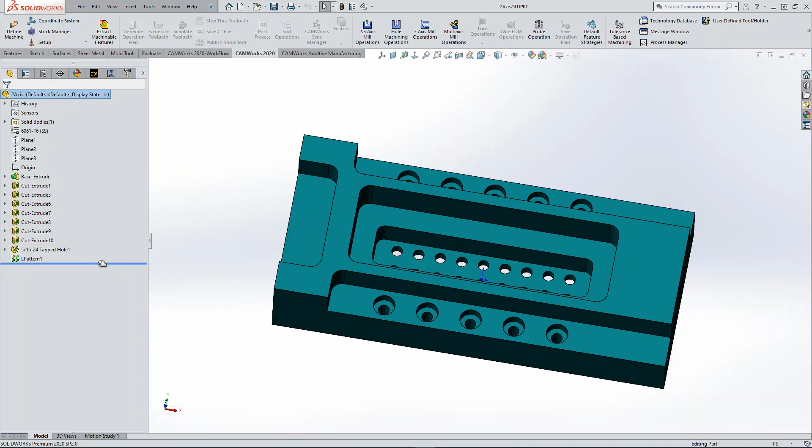But if we look at something like this, for those of you who aren't familiar with SolidWorks, you're basically going to start out with the basic block of the part. You're going to draw up a sketch, tell it how thick it is, and then just either add or subtract from there. So you can see how this SolidWorks feature tree is all built right into this part.

And a lot of that is pretty important in CAMWorks because it sees things like that. It sees that this pocket is 1 inch deep. It sees how wide it is, how tall it is. One of the beautiful things about CAMWorks is it reads the solid model. That's what makes it a very powerful CAM system. So I'm going to go right over to my CAM tab, my CAMWorks feature tree.

Also integrated right into my upper tabs here are going to be CAMWorks. We have a CAMWorks workflow tab. We have a CAMWorks 2020 tab and even a CAMWorks additive tab.

So my first job now, after getting the model, either drawing it or opening it up, is selecting what type of machine I'm going to be using. So I right-click my machine mill, I edit definition. Here's where I select what mode I'm going to be in CAMWorks, whether it's milling, turning, mill-turn, wire EDM, or even the additive. I'm going to just select the mill. Even though I'm selecting mill, I can now also do full 4 and 5 axis indexing from here, and I can do 4 and 5 axis simultaneous.

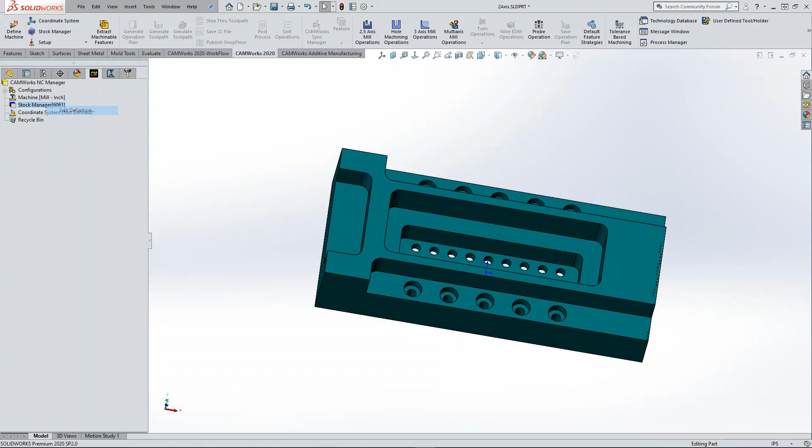So that's done. Now I'm going to go and manage my stock. So I'm going to edit definition on that. First thing you're going to do is select the type of material you're cutting. There's about 25 in this list, and inside our CAMWorks database, there's well over 1,700 that you can add to this. But that's going to drive your feeds and speeds library.

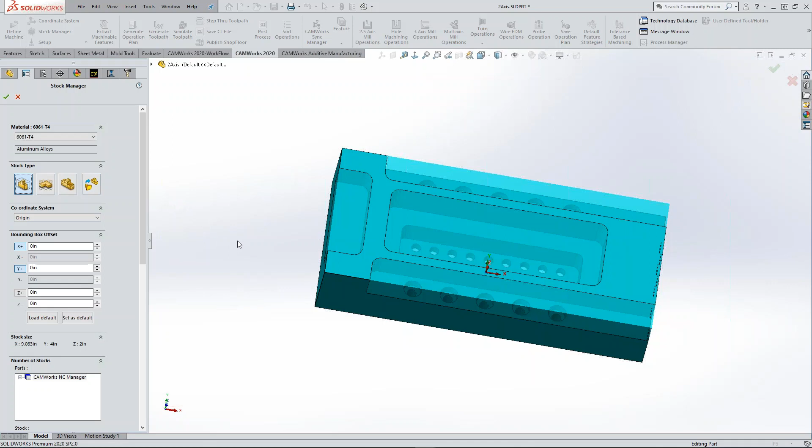Then you pick the stock type or shape. So there's 4 ways in milling to do that. You're either going to do a bounding box like we see here. It defaults to that. You can grow those numbers X, Y, and Z. You can use a sketch for your stock. Draw it up in SolidWorks, and that's your stock shape. You can do an STL or a whole other SolidWorks model. Those last 2 are great for second operations, third ops. They're great for castings. That's when I use these 2 quite a bit. In this case, I'm just going to leave it at the bounding box.

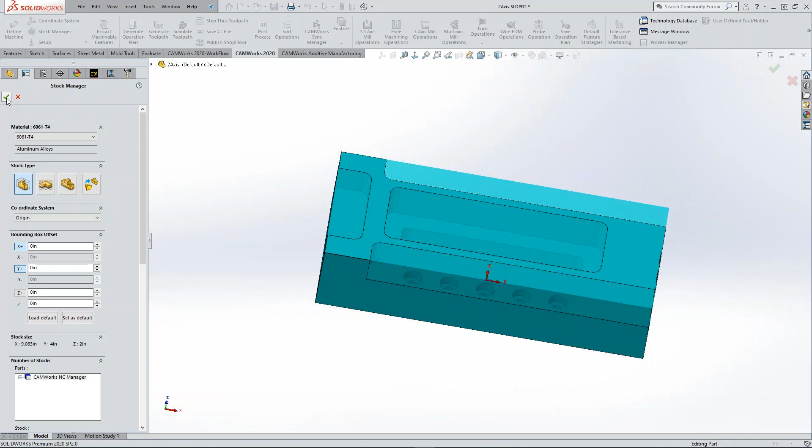Now I'm going to do something that's pretty unique to CAMWorks. It's called Extract Machinable Features, or Automatic Feature Recognition. I'm going to click that button, and what it's doing is analyzing the model. It's trying to find as many 2D features as it can. And that's a tool that really helps you out no matter how complicated your part is. It's going to have some basic 2D pockets and holes. That kind of stuff CAMWorks finds for you automatically.

So just by clicking that button, it's found a rectangular pocket here, a group of pockets here. So I can click on each one of these and I can see what the software has found for me automatically. It's also found what we call a curve feature. This is a brand new feature for 2020. It's going to deburr this whole part, every sharp corner on this, with one single toolpath, and it did that for me automatically.

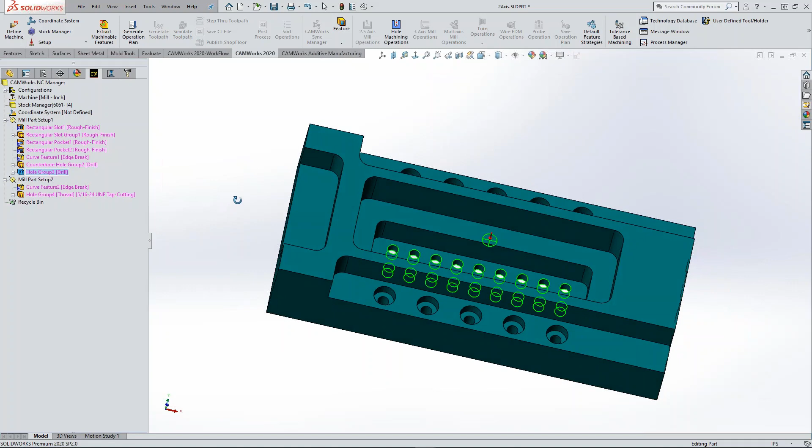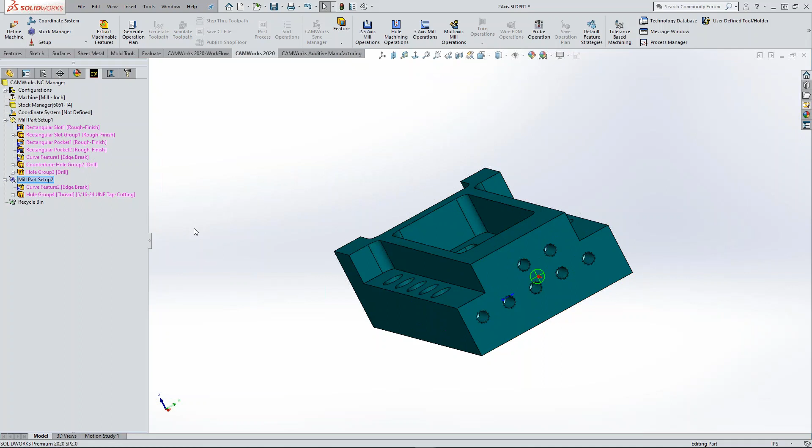It's also finding hole groups, so it sees the diameter, the depth. It even knows that those are through holes, and it's going to see these counterbore holes for me also. The other thing it did when I hit that extract machinable features button was analyze the whole part. So it sees that there are features on this side over here also, and it created a whole other mill part setup for me. And it's going to find the features that it can there.

Now this is a great tool to speed your programming up. These 2-axis features, I don't have to manually go in and make them. I don't have to pick these edges and tell it this is the shape of the pocket, and then go tell it it's an inch deep. These kind of simple 2D features are done for you with the software.

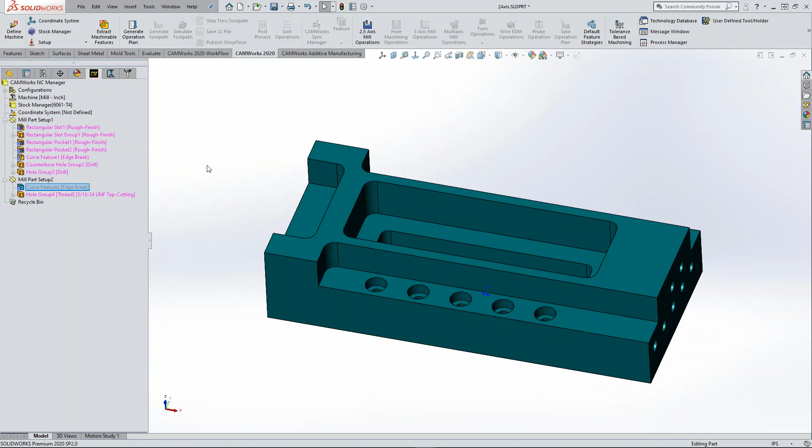I'm going to go ahead and just press this one. I don't need that edge break on that second mill part setup. But from here, if I have more things I want to do, because that automatic feature recognition isn't the end-all result. It's not going to be 3 clicks and you're done. You still have to go in and make your own features, but to do that in CAMWorks, it's very straightforward.

I'm going to right click this mill part setup, and we're going to add a 2.5 axis feature. These are my feature types. This is going to be a boss. We're just going to walk around the outside of this part. So I'm going to call it a boss, and I'm going to pick a single edge off the model, and it's going to give me my correct shape.

Now I can go to my next tab, which is the end condition, and I'm going to select the top face of that part. 2 very important things that I just did there is I selected off the model to create the shape, and I selected the top face to create my height. What that means is if those were to change in the model, my software is going to see those changes and update the feature for me automatically. I'm going to show you a lot about that a little bit later.

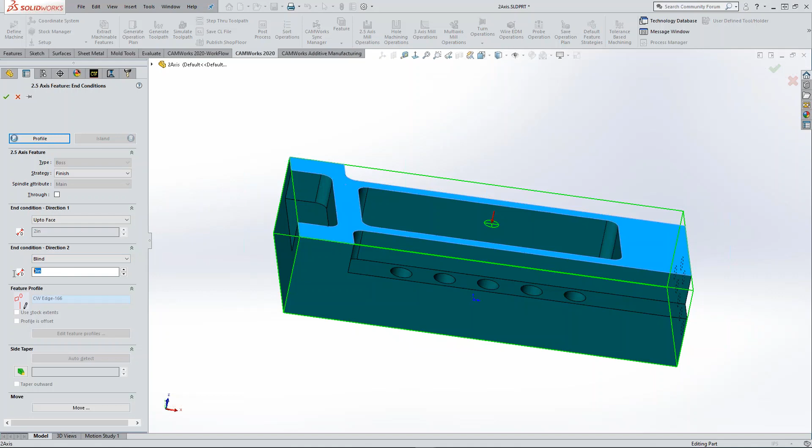But now I can go in and do whatever I want to do. I can pick my strategy for this boss. I can just do a course, or I can do a finish and an edge break. I'm going to leave it at finish. I can come down to my second end condition and just drive this toolpath a little bit deeper past the bottom. So if we zoom in, we can see we're just driving it a little bit deeper. So that's how you add your manual features in CAMWorks.

Very straightforward. I'm going to go ahead and do my next tab up here on the top, and that's Generate Operation Plan. What this does is it looks into my database, and it says, all right, we have a pocket. You've chosen rough and finish for a strategy, and it's going to give me a rough mill and a finish mill for that pocket. If I would have chosen rough finish edge break, it would give me 3 tool paths, a rough, a finish, and then another contour to break the edge. But that database is very important in CAMWorks.

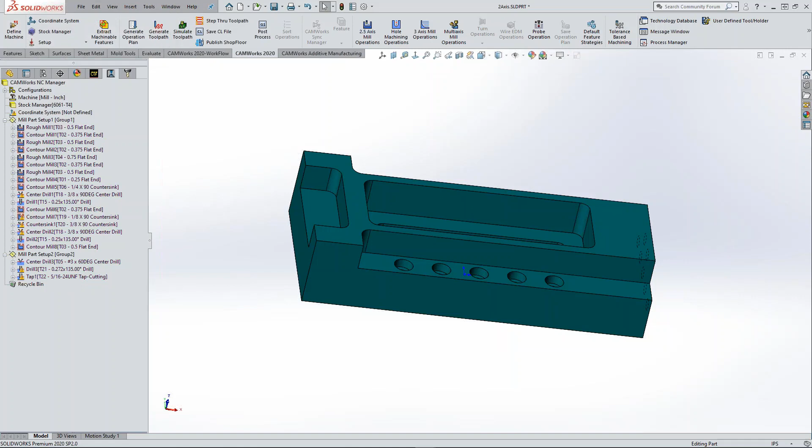I'm just going to go ahead and click the next tab, which will then generate these tool paths. And now I can physically click on each one of these and see tool paths. But that's all coming from the database that comes with CAMWorks. That's that editable feature that I was talking about, that you teach this software. As soon as you get it, you start teaching it how you guys do your machining in-house. So it comes in a little bit vanilla. From there, you teach it exactly how you do your machining.

So if I right click on any one of these tool paths and edit this, you're going to see the parameters that are set in CAMWorks. So here's my tool. I bring my pointer off the screen, I see the tool. If I'm on the mill holder tab and bring my pointer off the screen, I'm going to see that. It's all interactive, so it's very visual. If I want to drop that down, my protrusion, you're going to see that it drops it down right on the screen. But every other parameter for this toolpath has been set in CAMWorks.

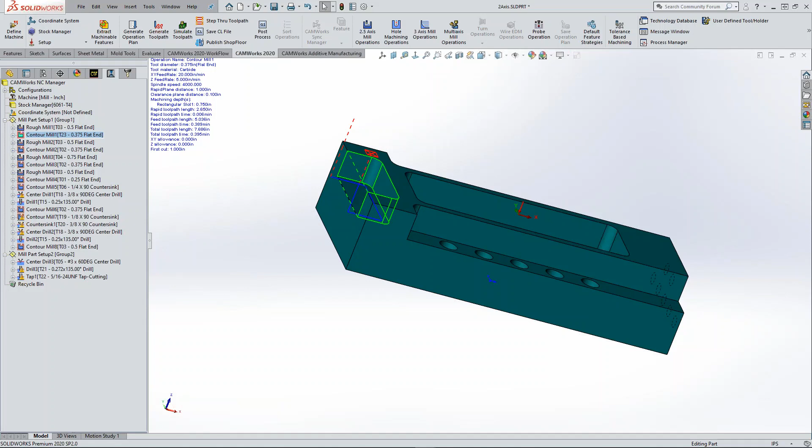And it's completely editable on the fly, or you can save it in the database and it'll remember it from there on in. I think that's a key right there, is the ability to be able to save it. So you can take a knowledgeable machinist that's been doing this for years and years and have them work hand in hand with your CNC programmer, and the two of them together can really put together a nice strategy for machining your parts. Exactly.

So at this point, I've got a little bit of work to do. So I can reorder any of my toolpaths. It's all Windows based, so I can just drag and drop things if I need to. I can edit the toolpath like we were doing before.

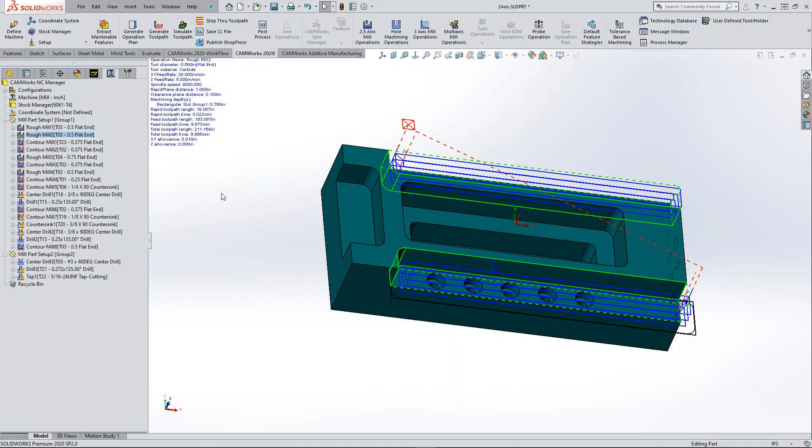Or I can come in here and simulate this toolpath. So if I right click on this mill part setup and simulate this toolpath, this is one of 3 ways you can simulate in CAMWorks, and I'll show you each one of them. But this is the prettier one where you see the material being removed and everything like that. It does a real nice job with the simulation, because this is pretty important.

We want to make sure we're not having any crashes at this point. If we're going to do something wrong, we want to have it happen on the computer screen, not at the machine. So simulation is a very important portion of this. So I ran through that pretty quickly, but there's a neat little tool inside my simulation. It's called Show Differences. So the colors I'm seeing on the screen now are just related to the toolpath colors in CAMWorks. But if I click on this button here, the Show Difference, I'm going to get a graph in

the upper left corner. Green is good. It's cut to the solid model. So what this is doing is it's analyzing my cut toolpath to the solid model. And green is what I'm looking for. Blues, we still have some work to do. We shouldn't really be having any blue, but you can see on those tapped holes, I never simulated them, so they'll be blue. But yellows, oranges, and reds, that means negative.

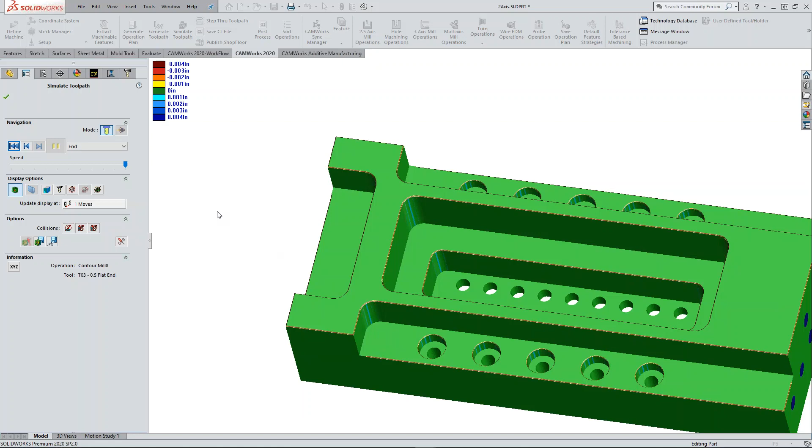That means I'm cutting into this model. And I'm expecting to see that on every one of these corners because CAMWorks deburred this part for me. So that was something I was expecting to see. I'm going to close out of that. And at any time, I can go ahead and simulate that, make a change, do another simulation. CAMWorks does a really nice job with that.

Other things we can do very quickly, if I want to move my origin, I just right-click my mill part setup, and I can, at this point, move this wherever I want to, whether it's a vertex of the stock, top, mid, bottom center of the model. It'll always default to the top. If I want to move it, I just click on an edge, and it'll put it right to that spot. So now that's going to be my new G54. I click OK. CAMWorks is going to tell me there's been a change to my origin, and it's going to regenerate my toolpath. Now everything's coming from that new coordinate system.

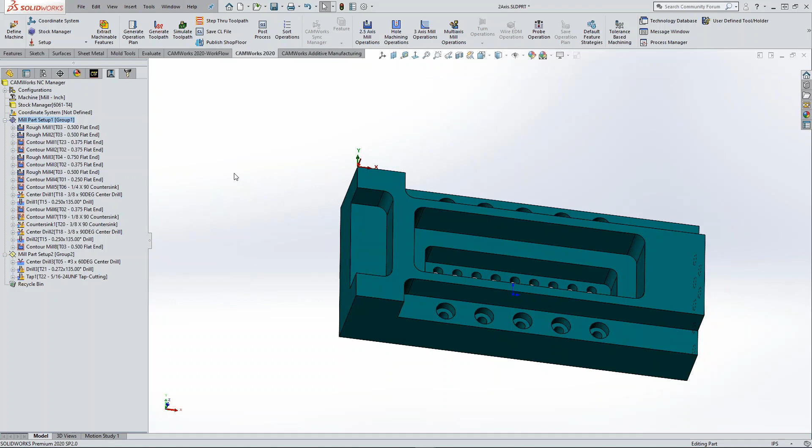Now, the next thing that's going to happen is somebody's going to want to make a change to this model, because I'm just about ready to post this out. If I wanted to, I could right-click, post-process this part. But inevitably, someone's going to make a change to it. So let's take a look and let's make a change to this model, see what happens. Now, we know this doesn't happen in your world out there if you're listening to this webinar, but we hear from time to time that this can be a very frustrating portion of engineering and manufacturing working together. But we've got a way to kind of simplify that.

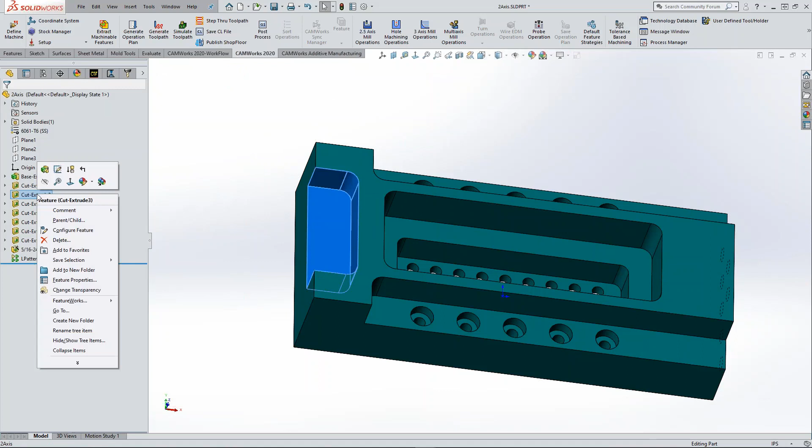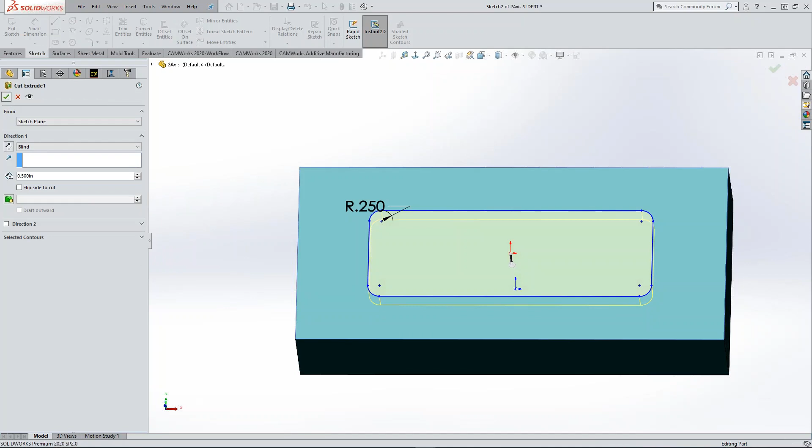So I'm going to go over to my SolidWorks feature tree and make a few changes to this part. So let's go change the size of this pocket. Rebuild that. So we've made that a much bigger pocket. Let's go look at this one. This one will change the thickness of this part. So it's an inch deep now. I'm going to make it a 1/2 inch deep pocket, which will then also make this one deeper.

And then maybe we'll make a change on the part that wasn't there before. So if we go into our hole wizard, maybe we'll throw some tapped holes in here. I'm going to put a tap hole on these faces. And I'm not even going to fully define them. We'll just put them on the model. So we haven't made huge changes to this, but we've made some big enough ones. Next time I go to either one of these 2 tabs, it's going to give me a message. It reads that there was a change to the model. And that's a big time saver.

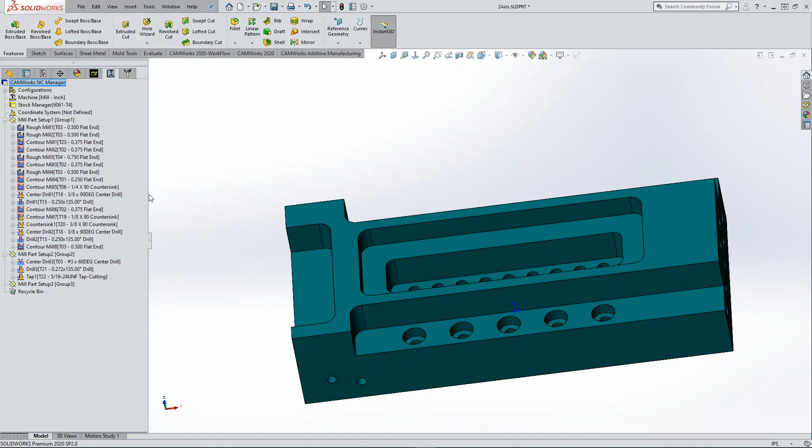So I'm going to click OK, and it's going to analyze the changes I made. It's going to do about 3 things in the background that are very important. Number 1, if I would have changed any of my toolpaths, it's going to remember that. So I reordered these toolpaths. It didn't go back to normal. It kept that and kept all the other changes I may have made.

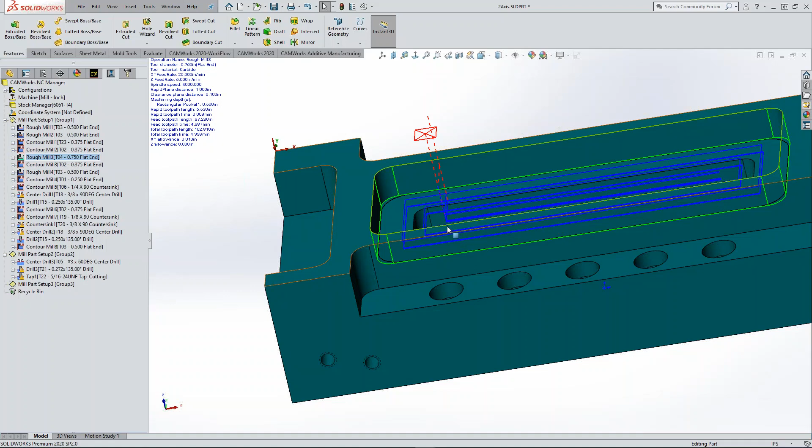But if I look at this rough pocket now, it sees the larger pocket. If I go to my inner pocket, rectangular pocket, it's only cutting it down to a 1/2 inch. So literally I can right click on this and repost it.

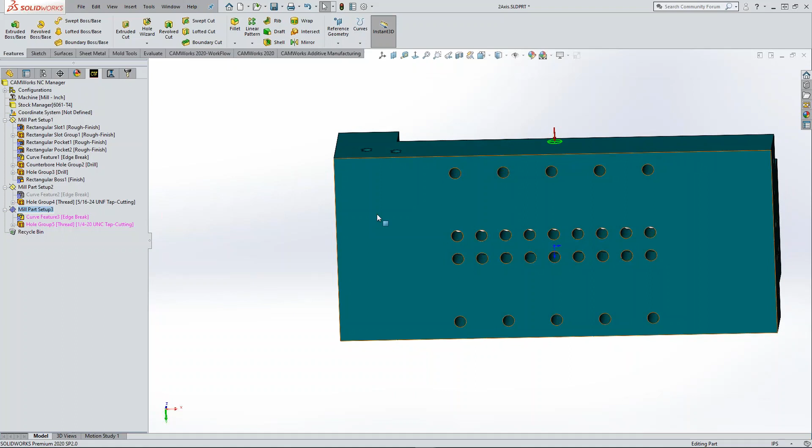And that change really hasn't affected me too much. The other thing it's doing, if I go back to my CAMWorks feature tree, it created a whole other setup, saying we're going to need to set this up in the vise like this because now we have 2 features that have been added to the part, and it sees them. It sees them as tapped holes, so it even knows they're 1/4-20 tapped holes.

If I right click on that and generate the operation plan, it's going to give me a center drill and a tap for that 1/4-20 tapped hole. And that's a big plus with CAMWorks. It's all the kind of things that, you know, I've been doing this for 15 years now.

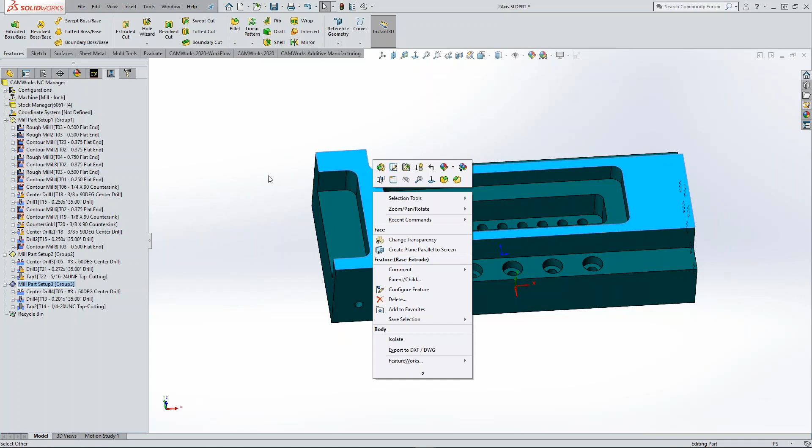You kind of take it for granted, but I'm running inside of a very good CAD system, and I never leave that SolidWorks environment. Anytime I need to draw things or draw my tool path or draw my stock, I'm just right clicking, doing sketches. I'm using the power of SolidWorks as my CAD throughout the whole process. So that's basically 2.5 axis milling on a single part.

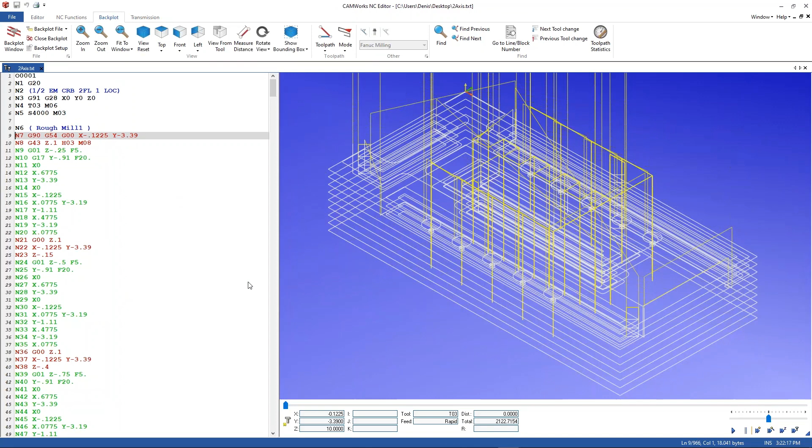There are a couple things I did want to touch on real quick. What I would do now is right click and post process, which is a pretty straightforward process. You hit play, and you've got your code ready to be sent out to the machine. CAMWorks comes with CIMCO Editor, which is a great editing software. It's got backplotting, all color coded. I really enjoy this editor.

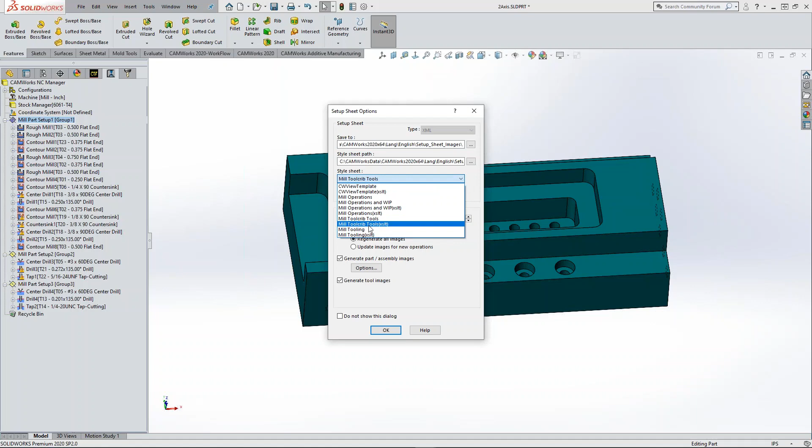Another thing that's a great little tool is called Setup Sheets. I can right click on this setup, mill part setup, and generate a setup sheet. There's about 6 or 8 built-in templates for setup sheets. Let's go click on this one. And this is something that you can print out, send out to the setup guy, and he can have a list of tools for his setup sheets.

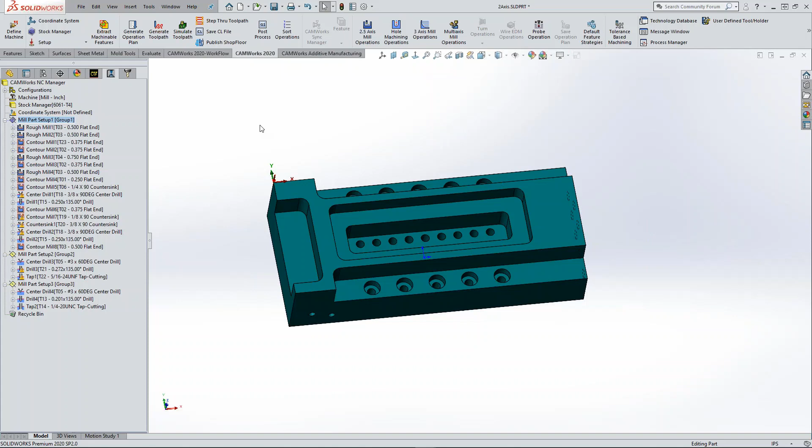Another thing that's brand new for 2020 is going to be probing. So CAMWorks just added probing cycles to its package of CAM system. If I right click, I can now come in and do a probing operation. I can pick the probe I want to use. And this is going to be an example of how I want to do this.

I can probe just Z. Come in here and probe this face. You can pick your location for the probe. You can tell it to now give me a new work coordinate system, G54 or not. So that's a real nice thing that we've just added with the probing. I'm just going to drag that up to the top.

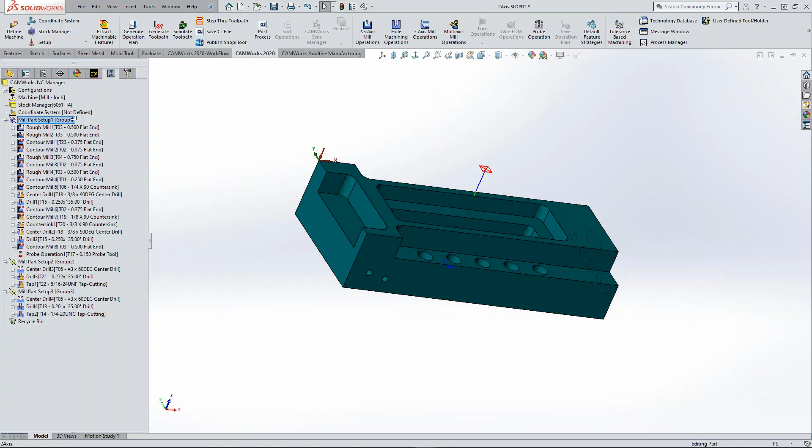So we need to, in mid pocket, measure a pocket size, or maybe even just measure the hole before we start tapping something. Make sure that drill didn't snap off in the hole. We can go in and probe that hole. So that's my 2.5 axis. Now I did want to show you one more thing. I'm going to go ahead and show you.

In 2019, they added something called ShopFloor. I had 3 different things I had to do to get the posted code, to get the setup sheets, and a list of things that the setup guy needs. What they created in 19 was something called shop floor. I'm going to click on ShopFloor, and I'm going to publish this.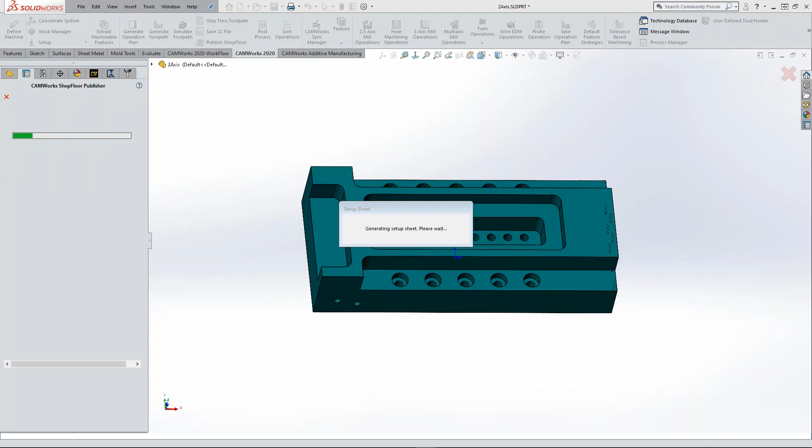This is something that is going to be on a computer out at the machine. Computer, a tablet, whatever you need to have out there. This is not going to have CAMWorks. This is not going to be SolidWorks. It's just going to be on the tablet or the computer at the machine. So this is what the setup guy is going to be able to see.

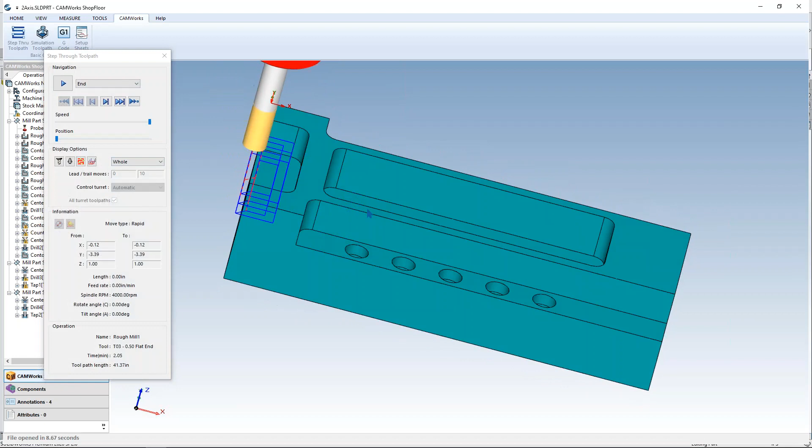He's going to be able to analyze his model, measure anything he needs to on it. He's also going to be able to look at every one of the tool paths, simulate them, step through them, and he'll be able to see exactly what's supposed to be happening when he goes to post-process it or hit the go button on the machine.

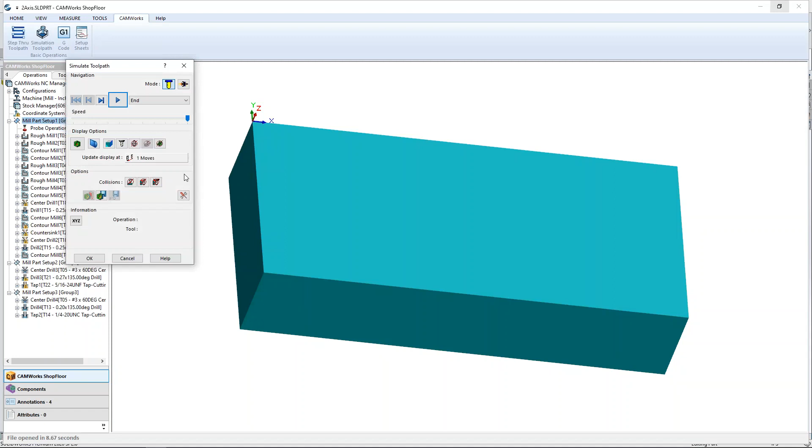Another thing that shop floor created was my G-code. It's all in a nice package. CIMCO editor's got the back plot and everything like we showed before. This really eliminates the need for a paper trail, so we don't have to have the programming department taking paper or here's a print of what it looks like for you to match what I did. This eliminates that. For all of the lean folks out there, this is a great opportunity to have within a CAM system the ability to eliminate paper.

All of this could be done out at the machine if he had a seat of SolidWorks and a seat of CAMWorks, but this eliminates that. This is now something you can do with shop floor, just having that out at the machine. The other thing in this package is your setup sheets. You're going to have everything you need in this bundle - by clicking one button, it created my shop floor file for me.

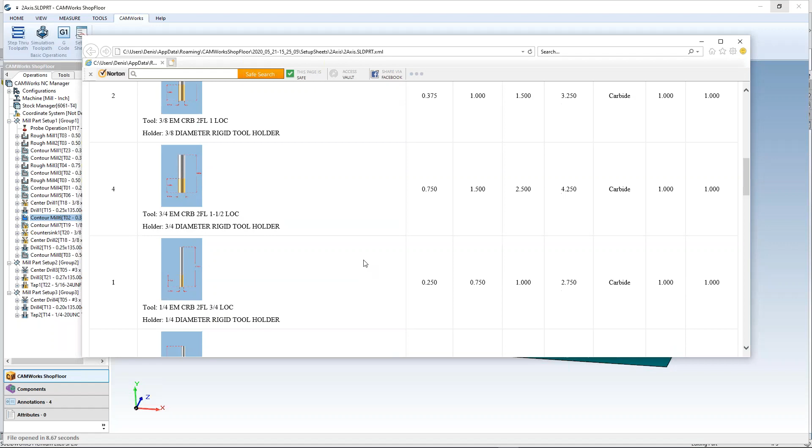I think that's a really neat thing that they came up with in 2019.

All right, so now I'm back into SolidWorks, and now this is just part mode. If I wanted to do still just 2-axis milling, we can do that in assembly mode also. Here's an example of, because it's nice to be able to visually see what you're doing and know what's set up at the machine. So we've spent a little more time in SolidWorks to create the assembly.

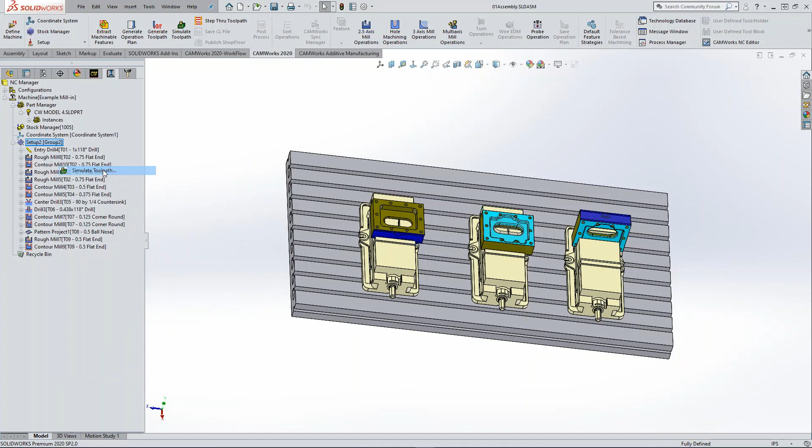When we come over to CAMWorks, this would be considered assembly mode. You tell CAMWorks what the part is, what the fixture is, and now when you simulate it's going to show you if you're having any crashes onto these vices or this table. Hopefully you're not getting down that far, but this is very important also. This is also included in a basic seat of CAMWorks - if you were just to get 2D CAMWorks, you can do assembly modes also.

So we're just going to slow this down a little bit more and show you again. This is an example of a volume mill tool path that it's doing. CAMWorks started using volume mill about 6 years ago - it's a great high-speed roughing routine.

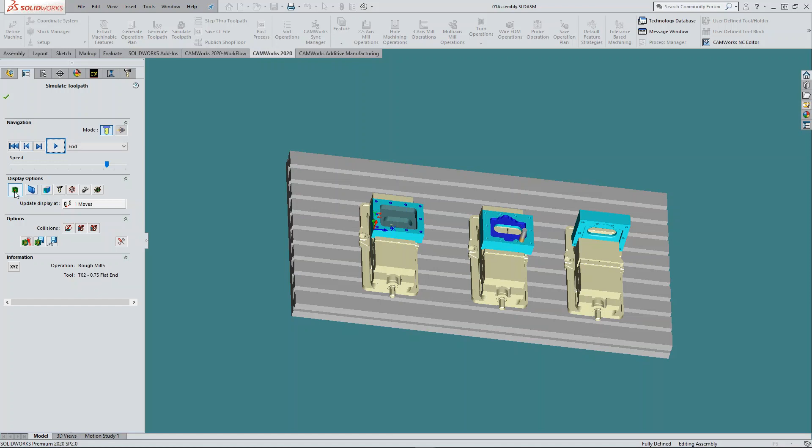So we can stop that at any time, hit that show differences button to see if you have any issues, and it's going to analyze that model. Here's a good example - I stopped it in mid rough tool path for that strange shaped pocket, and you can see how that's blue, but we definitely don't see any yellows, oranges, or reds, so that's a good thing.

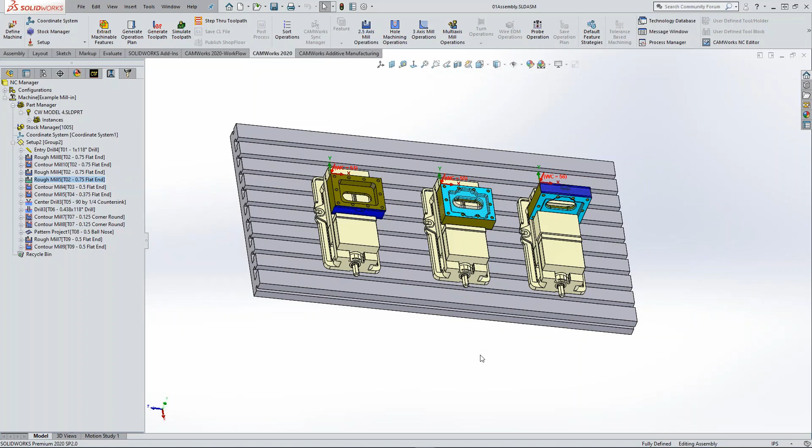So that's assembly mode, and that could be a flat table like this. This could be a tombstone drawn up with as many parts as you want on it, doing your 4-axis indexing. Assembly mode is something I use quite a bit, and it's very powerful in CAMWorks. You could draw up your 4th-axis indexer laying down on the table even - I've got quite a few customers doing that too. So that's my 2D milling, part mode, assembly mode.

Now we're going to get into the good stuff. We look at some 3-axis machining. This is just a part, a little mold part, drawn up in SolidWorks.

My first job, just like before, is going in and picking my machine. I'm going to go to my CAMWorks feature tree, right-click my machine, edit definition, and just select my mill. When I do that, it's going to select the tool crib and a post processor for me.

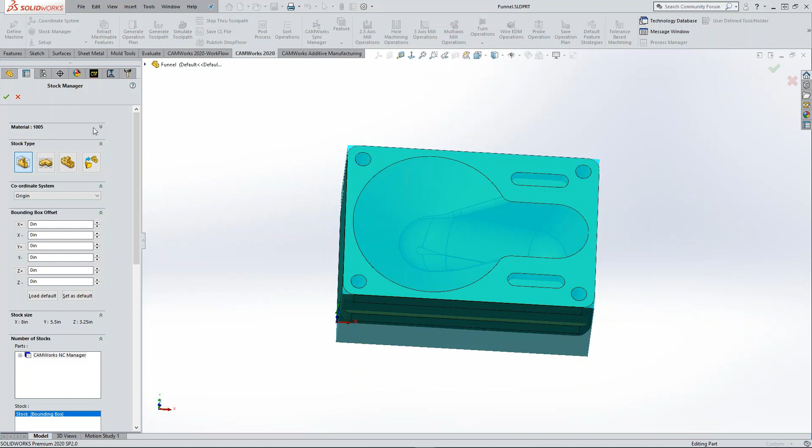Stock manager, just like before, you can right click and select what type of material you're picking and what size stock you're using. Now I want to start machining this part, so I can hit extract machinable features at any time. That's not going to find this 3-axis more complicated tool path, so I'm going to make that manually.

To do that, I'm going to create a mill part setup. I'm basically telling CAMWorks how it's sitting in the machine. So I'm picking this top face, controlling the green circle and the blue arrow. The blue arrow is the direction of the end mill, green circle is parallel to the table. That created this mill part setup.

From there, before we did a 2.5 axis feature - this time we're going to do a multi-surface feature. CAMWorks has a very strong 3-axis kernel. We can do any kind of slice patterns, whether it's just one direction or you want to spiral from a point or radiate from a point. You can even do a flow line where you pick 2 edges or 2 faces and flow the toolpath between that. That's all encompassed in this pattern project strategy. We can do a constant step over - that's the one I'm going to show you for this one.

That one's kind of neat because it takes whatever shape you tell it and morphs the toolpath to that. And then you can also do the Z level. This one is used quite a bit also. This is great for slight tapered walls, straight walls. It'll give you a nice clean Z slice on the part. And then all the other stuff down below is full 4 and 5 axis simultaneous.

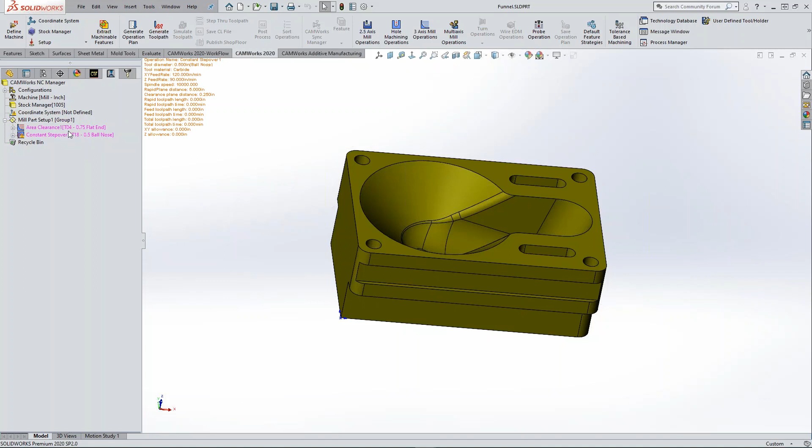I take that feature now and generate it. It gives me 2 tool paths. My area clearance is the rougher. I'm going to generate that tool path.

And I think you'll notice that Dennis didn't have to go in and create the toolpath. CAMWorks is intelligent enough to see exactly what he selected and the strategy he selected, and it created the toolpath for him. Yep. But still, I can go in and change it.

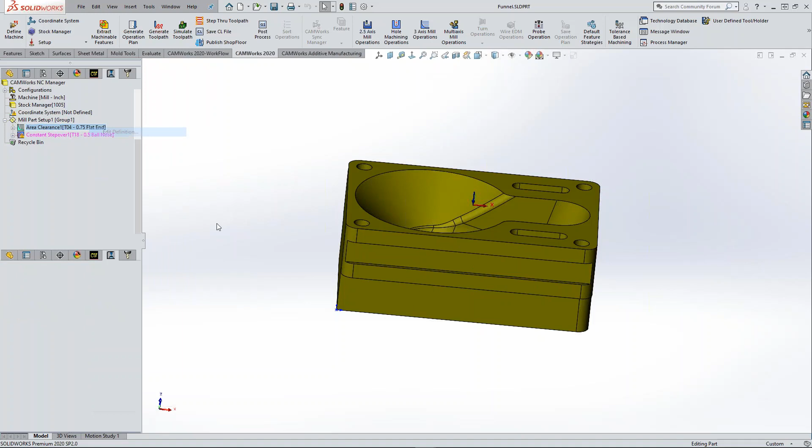So if I edit this roughing toolpath, it's defaulted to doing a pocket out pattern. You've got lace, which is basically a zigzag. You've got pocket in core, which is going to plunge on the outside, work its way in. You've got adaptive, and you've got volume mill. So volume mill is not just for 2.5 axis, it's also for the 3D.

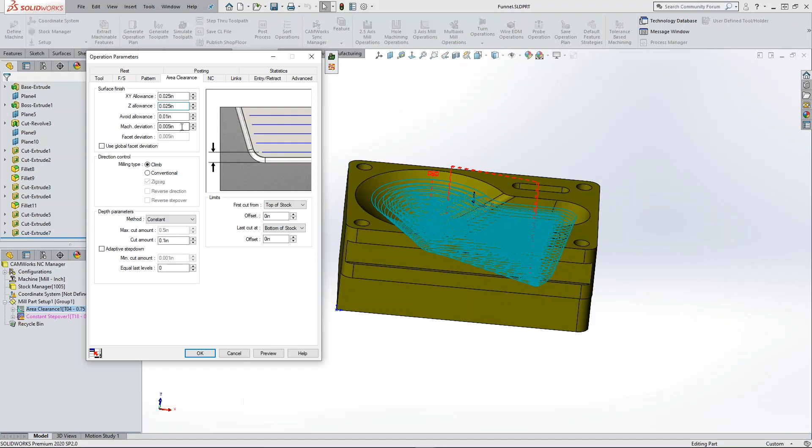And notice something with CAMWorks, they put this in about 4 years ago. Anywhere I select, the little picture right here updates every time, every button, anywhere I click on the software. So it's a very useful learning tool for you. This little picture may not seem like a lot, but it is great. I use it all the time when I'm teaching people. Just click on it and you tell me what that picture is telling you.

So they do a really nice job throughout CAMWorks parameters boxes. I don't remember what the number was, but it was well over 3,000 new pictures they've added throughout the years. But that's my rougher.

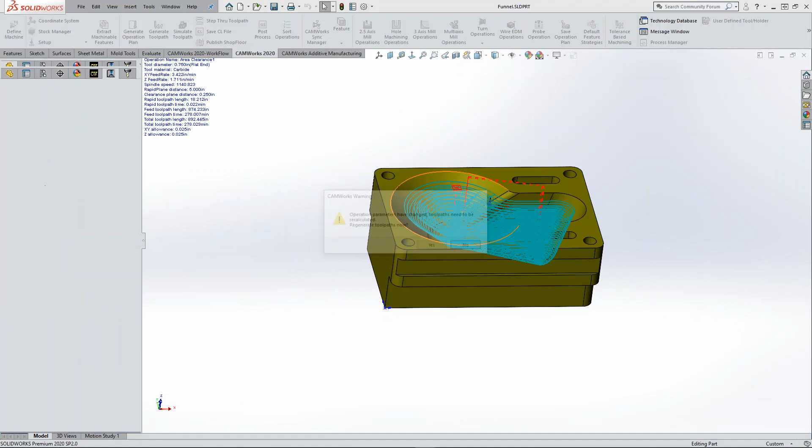It's just going to come in and clean out that material, to get it ready for my ball end mill to machine that out.

Now there's a lot of functionality in that roughing toolpath and the finishers, but the rougher you can now do rest machining. You can come in and tell it I'm using the biggest diameter tool I can get in there, and now I'm going to copy that toolpath and do rest machining to machine the rest of the cuts. You're going to come in with a longer, smaller tool and do rest machining from work in process, previous tool. You could even do it from an STL file or the current part. So they've got a very strong molding

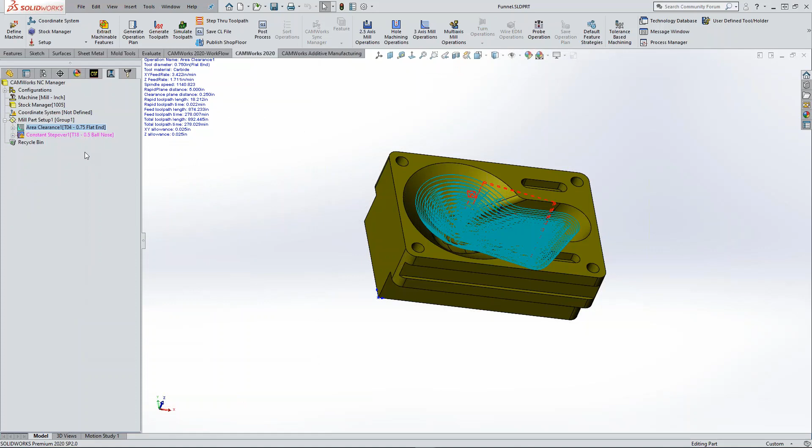functions from the 3D. Let's look at the constant step over. That's my finished toolpath. So if I generate this right now, this is the one that morphs to the shape I tell it to. So I haven't told it what shape to morph to.

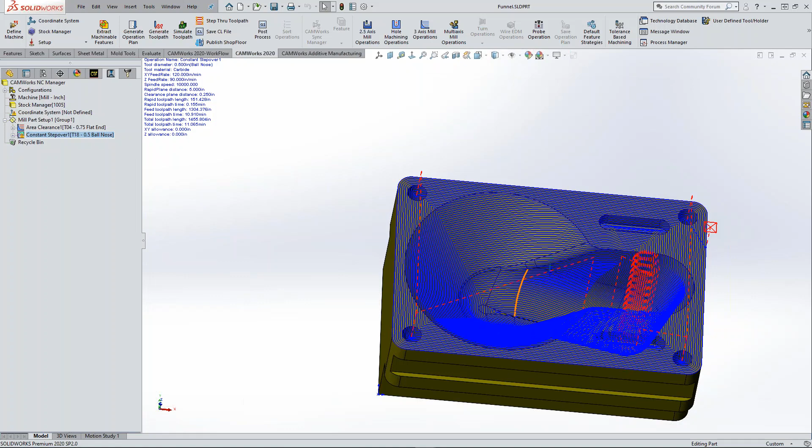So it's going to have a toolpath that's a rectangle, and it's going to try and cut the whole part. In reality, I just want to cut the light bulb shape. So what I'm going to do is right click and insert a new contain area.

And I'm going to click one edge off the model. It's going to give me a preview of what it's going to contain to. At this point, I can offset it larger or smaller.

I can tell it where to put that tool on that edge, up to that curve, on that curve, or past it. In this case, I'm going to say put the edge of the center of the tool on the edge itself.

And notice one other thing - anything I do in CAMWorks, when I'm making features, you're going to get an available sketches box. These sketches were made in SolidWorks. They are part of what whoever drew this part up used to make this part. So you're always going to have those available to you also.

But in this case, I'm happy with my light bulb shape. I'm going to click the green checkbox and regenerate my toolpath. This does two big things. It contains it to that shape, but it also completely changes the shape of the toolpath.

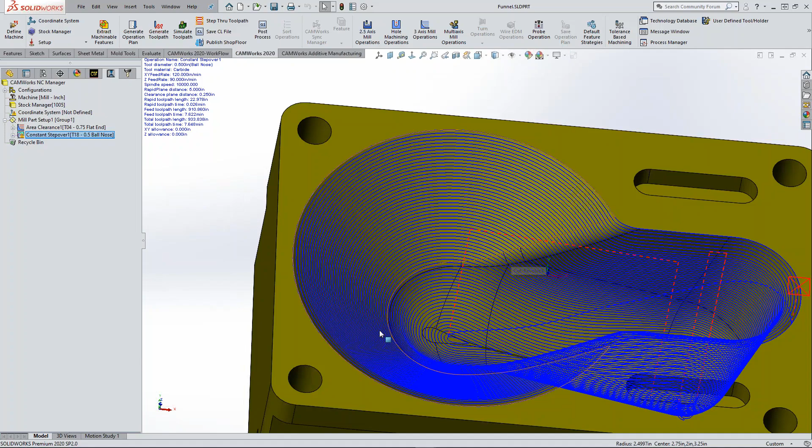So now I can see that it's flowing with this big arc here. It's coming around this corner and coming down here. It's doing a really nice job. That's why I like this toolpath, because the more you can flow with your part, the bigger your steps can be. You can do a straight old slice with a real tiny step over and get a good finish, but if you can flow with the shape, you'll get a much better end result.

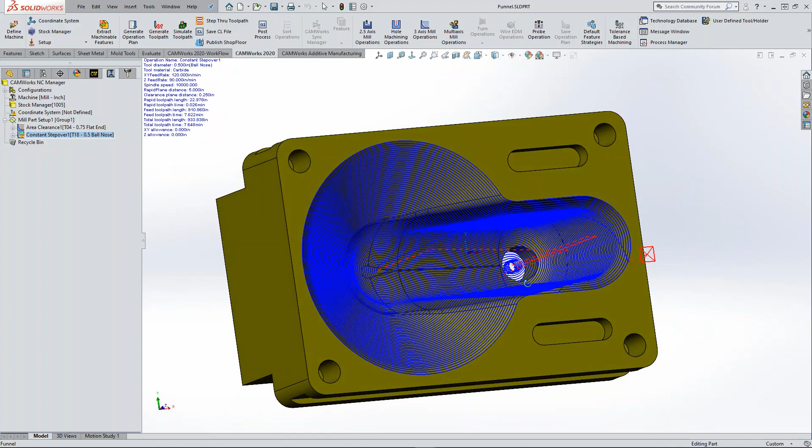So now I can see there's something I don't like. It's going down into that hole. I'm going to do the same thing, only different, an avoid this time. I'm going to avoid that bottom edge, telling the software not to go down into that. You have the same options: you can offset it, tell it to go on the curve, past it, or up to.

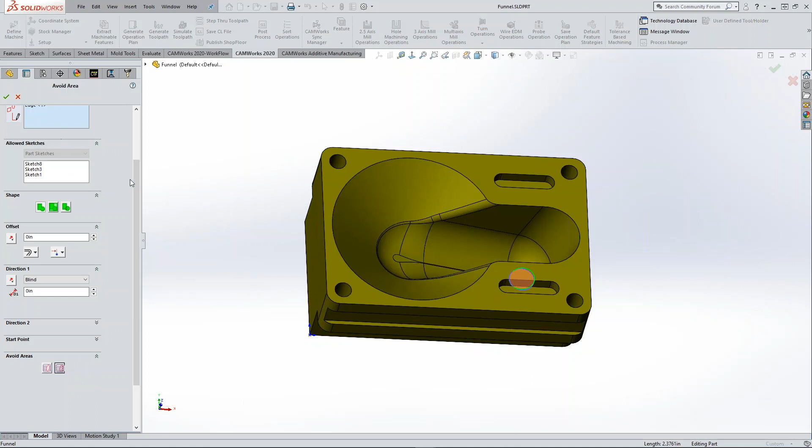One other thing that's kind of neat with avoids is you can tell it to machine around that avoid, or machine right over the top, acting like it wasn't there at all. So I'm going to click machine over the top and then regenerate the toolpath.

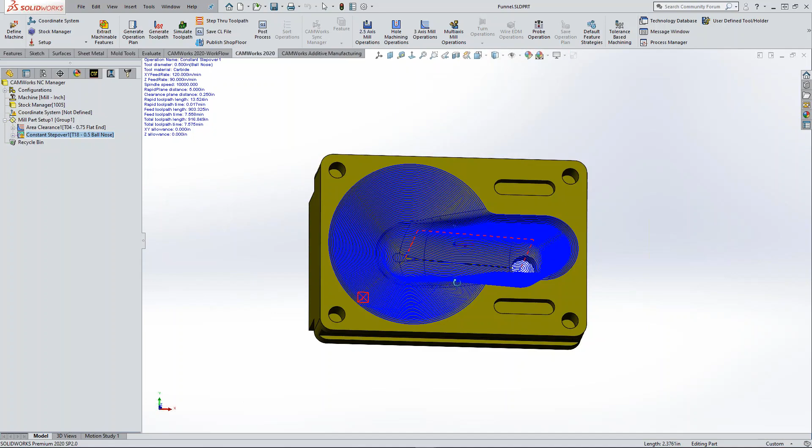When I was up in Green Bay actually machining, we did a lot of 3D and didn't use CAMWorks, we used a different CAM system. The difference is that CAMWorks is the most powerful CAM system I've seen on the surfacing side of things. But now you can see it's no longer diving down in that hole, it's just acting like that hole wasn't there at all. They do a really, really nice job with their 3-axis machining.

Here's another quick example of the constant step over. I'm just going to copy this toolpath - that easy in CAMWorks. I hold my control key, copy the toolpath, now pull it down. What I'm going to do is get rid of the contains that I had in the avoids.

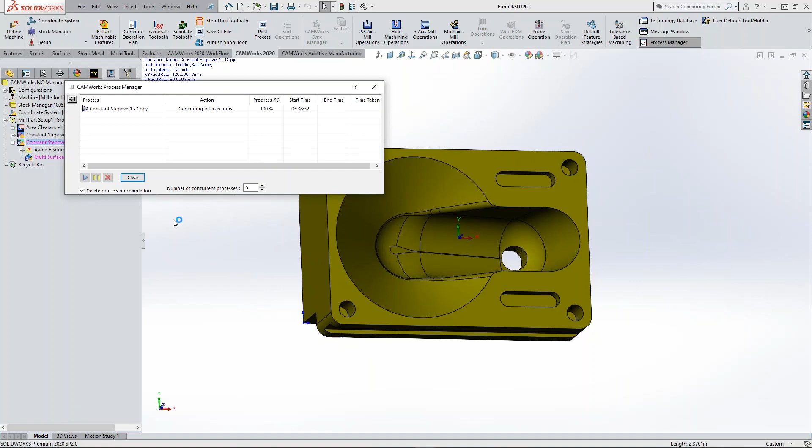Regenerate that toolpath. Because what happens a lot in surfacing is it's just one small section you want to concentrate on, or there's one section you have to use a nice small, long tool to get down into. So even though this feature was created just once, I can make as many toolpaths from it as I want.

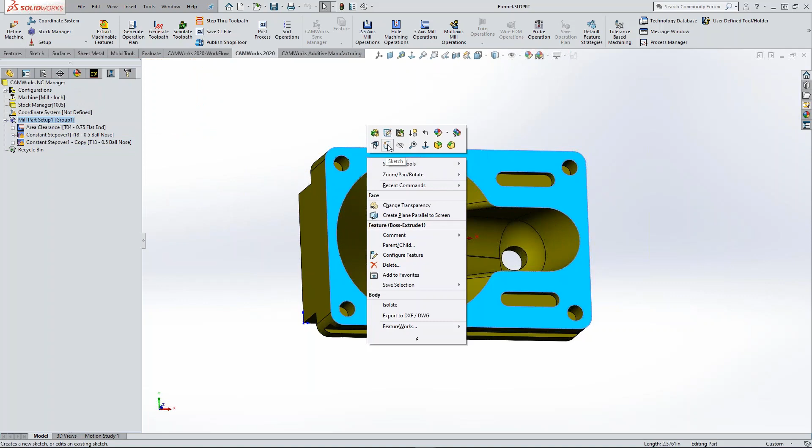I can come in here now and do a quick sketch right in SolidWorks. Notice I'm doing it right here, I'm not having to go to the feature tree - I'm doing it right here in CAMWorks. And now I'm going to contain using that sketch. I'll right click that toolpath and do another contain area.

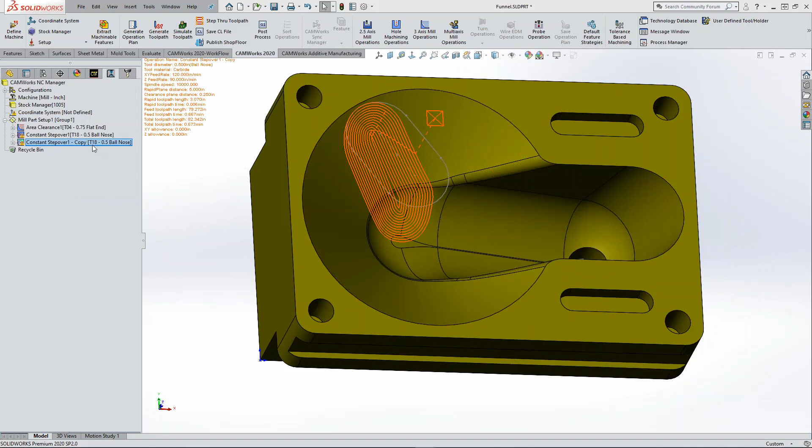Pick my sketch, put my tool right on that curve. Now it's going to do two things here. My whole toolpath is going to morph to that shape, so it's an oval shape, but now it follows that whole surface, and it's not going to gouge anything.

That's basically coming from when I made this feature, I selected every face on it. If I come in here and edit the definition, make this my step over - we'll just do a 0.01 step over - basically paint that toolpath on there. It's still going to maintain that shape of the toolpath, but it's going to follow that surface throughout.

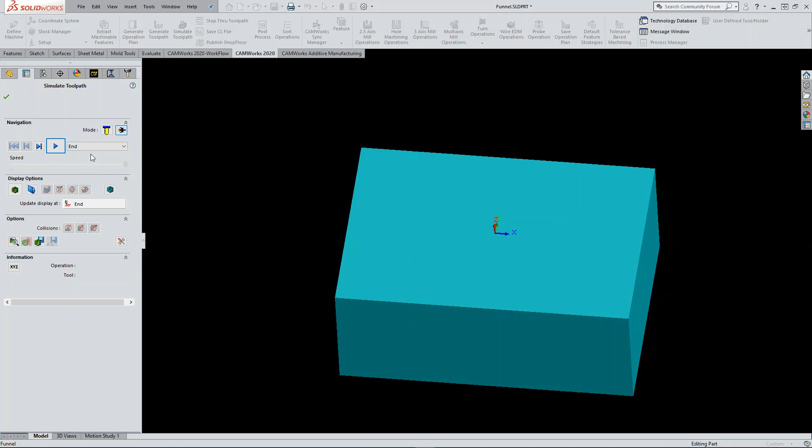Then we can come in and simulate that also. What I showed you on the 2D is called tool mode. We also can do what's called turbo mode in our simulation. I'm going to tell it to stop at every toolpath. Hit play - there's my roughing toolpath simulation, there's my finisher, and here comes the last one. You can even see the difference between the step overs in that one.

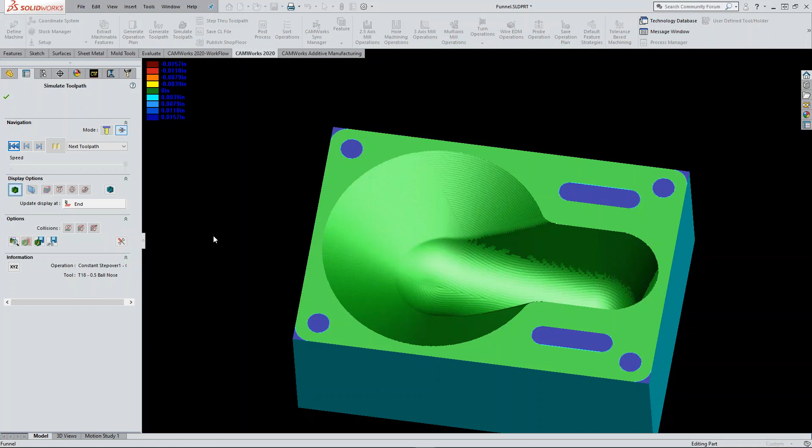Again, I hit show differences, I can see what I have left to do, see if I'm missing anything. Definitely not gouging anything, that looks good. If I wanted to, I could hit extract machinable features.

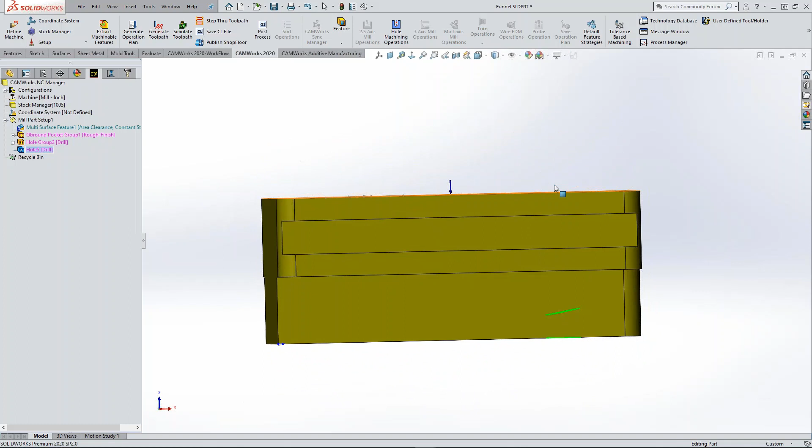Now we're going to bring in some 2-axis milling with the 3-axis. So it found that oblong pocket group, the 4 holes, put them together as a group also. It also found this hole down here in the bottom, which I'm always impressed with CAMWorks because the top of this hole is not flat, but it still sees that it can be cut from this side. You can always come in now and add these toolpaths.

Generate tool path. We've got everything we need on this 3D part - that's CAMWorks 2D milling, some hole machining, and some 3-axis milling.

Now we can look at some multi-axis milling. Here's another assembly, just a 5th-axis vise, and a pretty interesting little model, but this one was created using 5-axis CAMWorks. CAMWorks uses ModuleWorks for their 5-axis kernel, the number one 5-axis kernel that anybody has out there, so that's very strong. The beauty of ours is it's being used with SolidWorks, because you're going to use a little bit more CAD strength to get 5-axis tool paths a lot of times.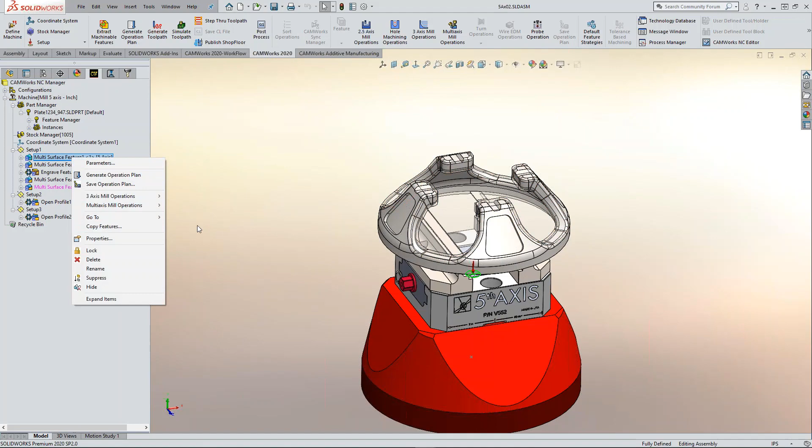Basically what I've done in this one is you create the feature. I'm telling it to machine - in this case, I just want to do a swarf cut down this flat all the way around. So I've picked that face and I've told it to do a swarf.

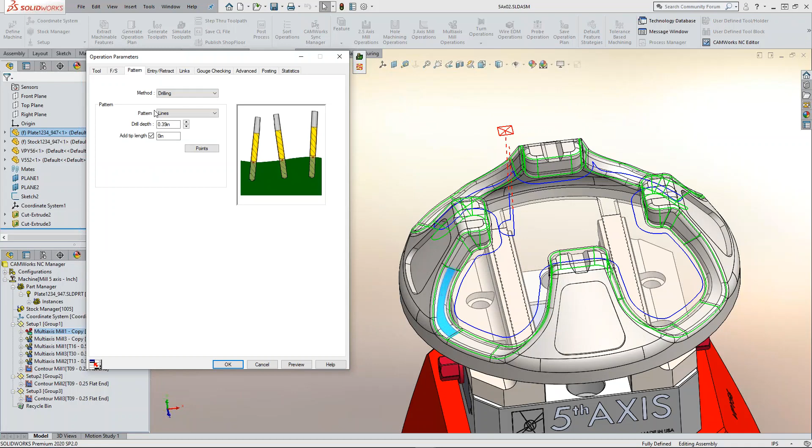We go inside this tool path, you can look at my parameters. Here's my tool, here's my pattern. We've got a specific method for just swarf milling - they came out with that about 4 years ago. You've got your milling method, there's 5-axis drilling that CAMWorks can do, and the milling is basically all of my patterns that ModuleWorks has. But the swarfing is specifically made to do that side cutting on a very organic model.

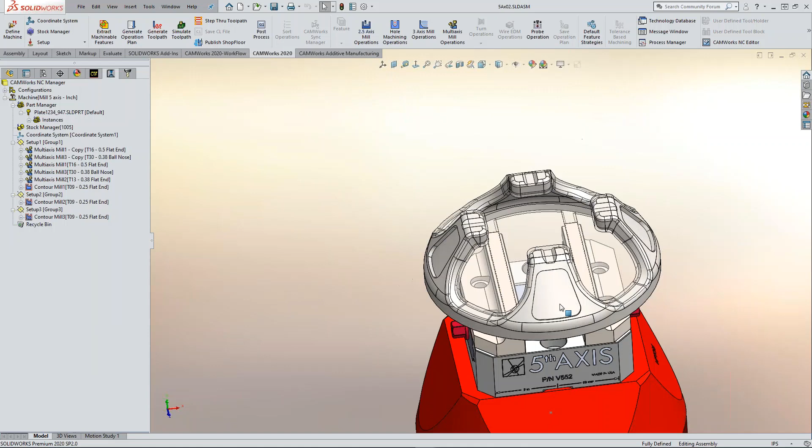So I've got my tool paths here, and now I'm going to show you the other two simulations that CAMWorks has - so the one you've seen already. I've got my STL model for my stock, and I've got my models for my fixtures. This is going to show simulation, and it's very useful.

It's going to tell me if there's any gouging with the tool, the non-cutting portion of the tool, even the tool holder, even though I'm not showing it. It'll tell me and stop my simulation if I gouge this. I don't like to show it too often, but this one does work very nice.

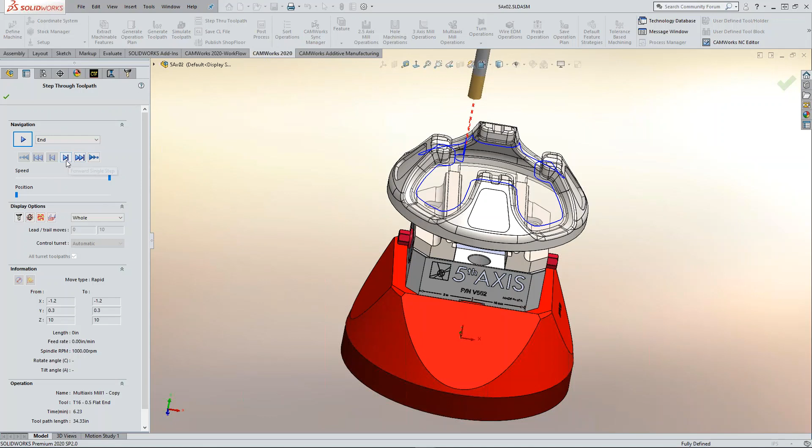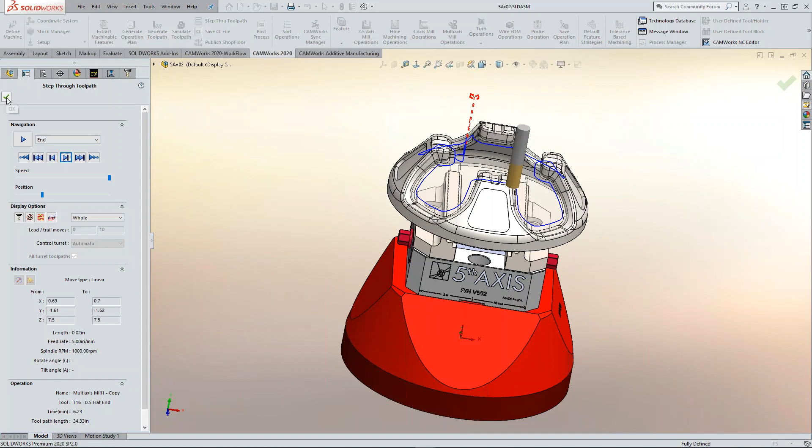Another one that I use, especially in 5-axis, is called step through. This one is not pretty, doesn't show the stock, but it's going to show me every move this tool is doing - from the lead in, it's giving me my X, Y, and Z moves down here. It's telling me if these are linear moves, rapid moves. But I will use this one quite a bit also. This is the step-through toolpath.

And then the last one, which is very important for people who are doing multi-turreted mill turns, definitely full 5-axis simultaneous, is called Machine Simulator. So that one we have two versions of - we've got a centerline version of that, and we also have a full-on G-code machine simulation in CAMWorks.

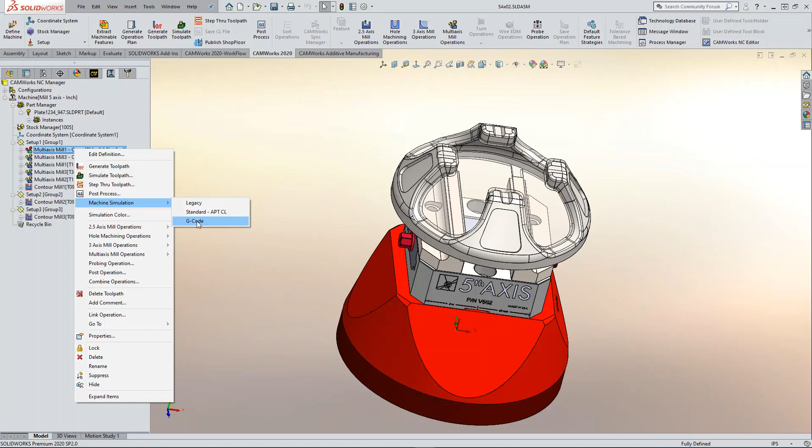I'm going to right-click on this toolpath, and I'm going to say I want to use G-code simulation. So it's going to ask me to post it first - very important, can't run G-code simulation without having the G-code first. And I'm going to hit the green checkbox, and it is now for the first time going to leave SolidWorks.

It's going to open up what's called Eureka - that's our machine simulating software. And now I'm going to see every portion of this machine, and it's going to run the gouge detection off of everything on this machine, even the small nozzles, the coolant nozzles. If they're hitting my part, it's going to tell me it's been hit.

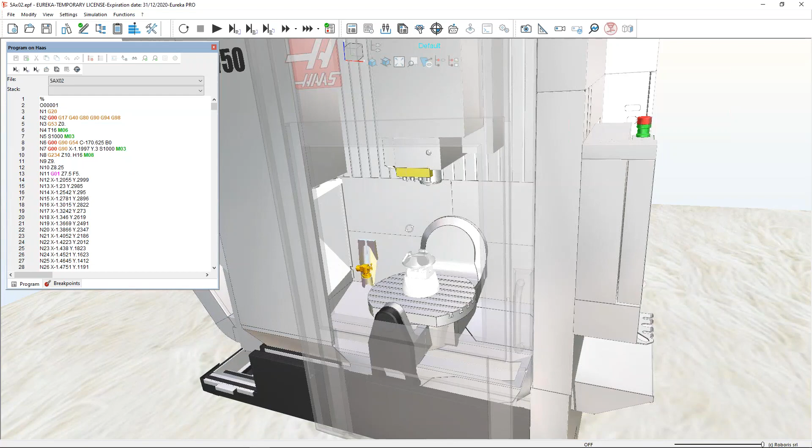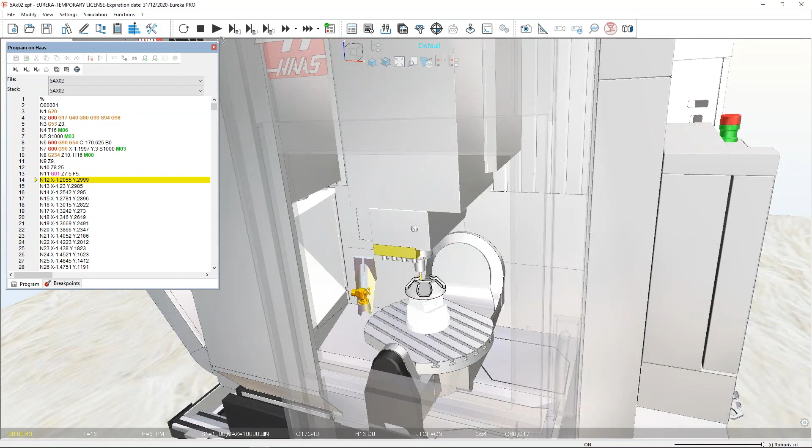So you can see on the left-hand side, I've got my G-code. CAMWorks automatically brought in all the tooling, which is very important with this software. It brought in the stock, it brought in my fixtures, placed it on my machine, and I can run this simulation. I'm going to turn off my toolpath mode, but this one is going to go through each individual G-code and show me the simulation. We can speed that up a little, but this is pretty important to make sure when you've got this very expensive machine running that you're not crashing something you don't want to.

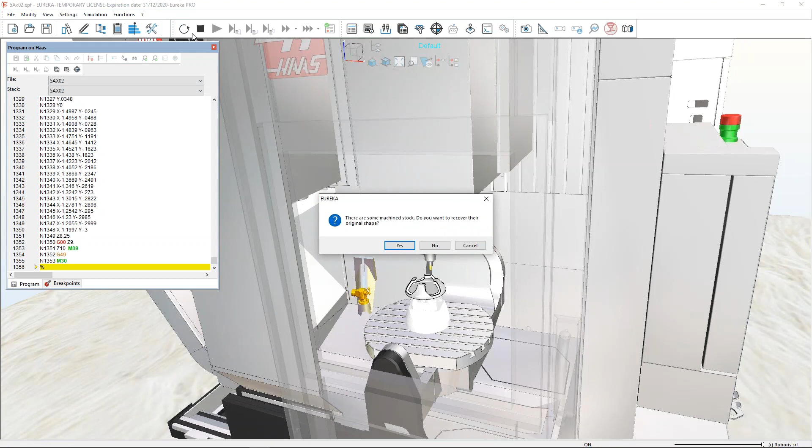All right, now I'm throwing a lot of different modules at you. I never talk money, but Joe does definitely - he'll be able to help you on that later on, but this is just giving you a little taste of everything that CAMWorks has. And this one is kind of the wow factor.

So whatever machine you have, we can create that machine and make sure that you've got the exact machine and simulation going on. So I think for time's sake, we're going to turn it back over to Sherry and see if we have any questions that we can answer.

As we did mention, we do certainly do full mill turn capability as well - that would be a much longer demo. Maybe she'll have us back to do just multi-axis and mill turn for the future. Actually, let me ask Christian if there are questions.

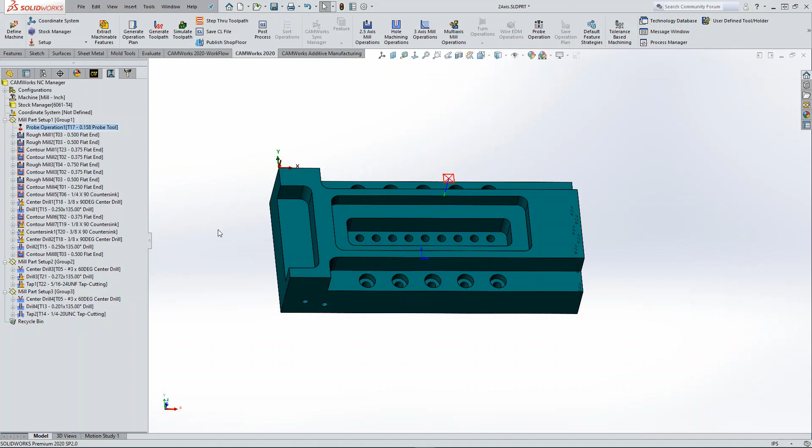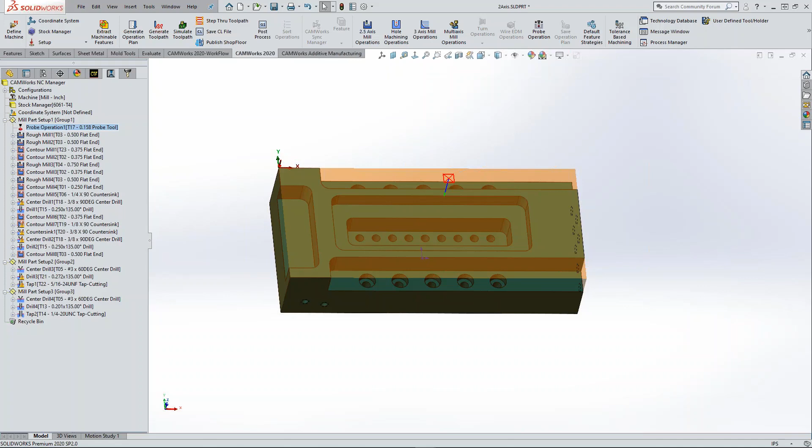Our first question here: do you need a license of SolidWorks to run CAMWorks? No, you don't. That's a great question. When CAMWorks was created many, many years ago, it did not have any CAD capability, so it strictly ran inside of SolidWorks. And as the partnership grew, SolidWorks provided a version of its package called CAMWorks Solids, which we renamed. So no, you don't need a seat of SolidWorks. We can provide you a version of SolidWorks for the machining environment.

Good question. Thank you.

This next question comes from one of our attendees. They're actually unable to attend any live trainings or travel for training. So is there anything that's available online as far as training goes for the software? Great question. When you purchase the software, you get something called Solid Professor. So it is a 4-hour online course. You don't have to have the software loaded. You can use it as you travel. You can use it at home. And you're able to go through step-by-step different tutorials. And that comes free with the software for both CAD and CAM.

Currently, with the environment that we're in, we're offering free web training for those that are purchasing the software, so we can do one-on-one specific sessions for you as needed. So if it's just milling, then we can do maybe a 3-hour or a 4-hour session. If it's an 8-hour session, we can break it up over 2 days. So we absolutely have the ability to do web training. And then lastly, what comes with the software also are your own tutorials that you can actually go through, and there's a full manual.

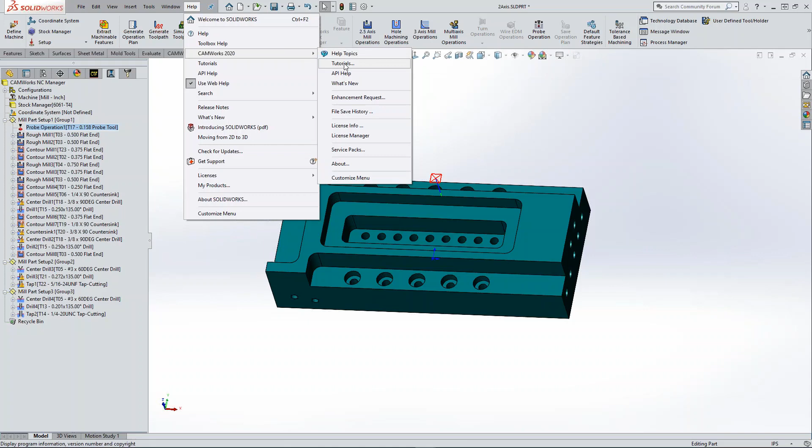Also, anywhere you're at in the software, there's help topics and help areas that you can click on right in the middle of a toolpath, for that matter, where you can just click the help area and it'll take you right to that specific spot.

Yep. Plus, when this whole environment is done with, we here at Access are right in Orlando. We've got a 6-person classroom where we have class once a month, and it's a 4-day class. And we go through everything. Hopefully, we'll get back to doing that pretty soon. Yep. We also have a mobile class where we go right on site and train. It's been a while, but

another good question. Are there specific types of CNC machines that will work with this program? Absolutely. CAMWorks will run your basic 2.5 or 2-axis mills, full 3-axis milling machines, machining centers, vertical, horizontal. It will run 4- and 5-axis indexing and positioning. It'll also run full simultaneous 4th and 5th axis if you're cutting impeller blades, or aerospace does a lot of 5-axis simultaneous. We also can program mill turns, dual spindle and dual turns for those that are familiar with